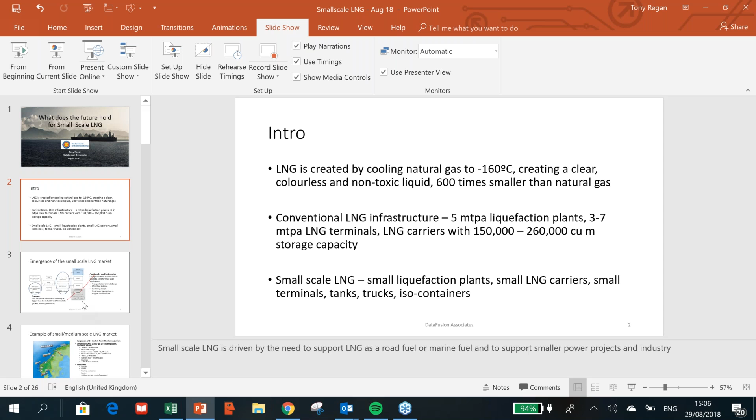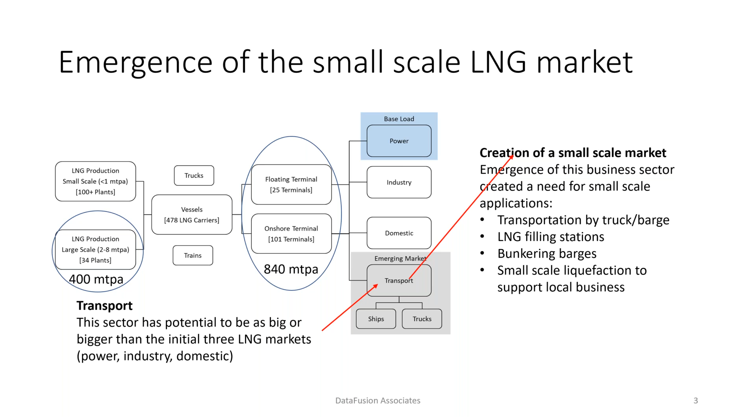But an emerging market now is LNG as a fuel - LNG as a marine fuel, and LNG to fuel trucks. It's the emergence of this market that is also resulting in a call for small-scale applications. In addition, we're seeing a lot of interest in LNG to power. Some of these power plants are very small, or they're located where there's very shallow draft, so you can only use very small LNG carriers, and the parcels required by these power plants are relatively small. So small-scale power is also stimulating a demand for small-scale LNG.

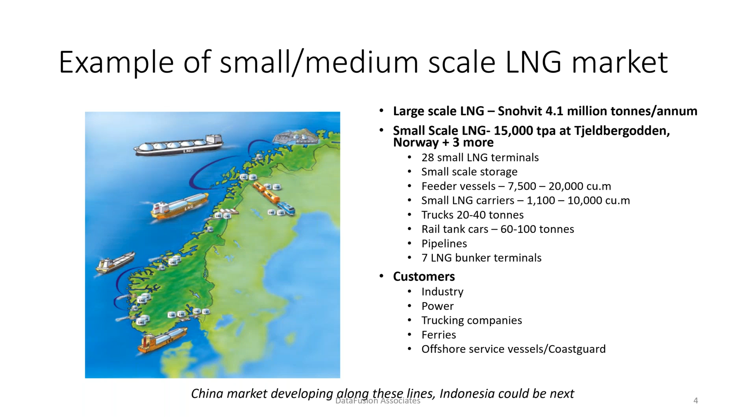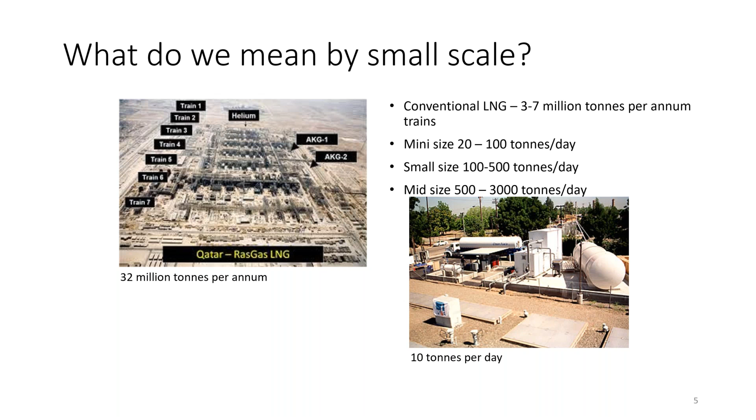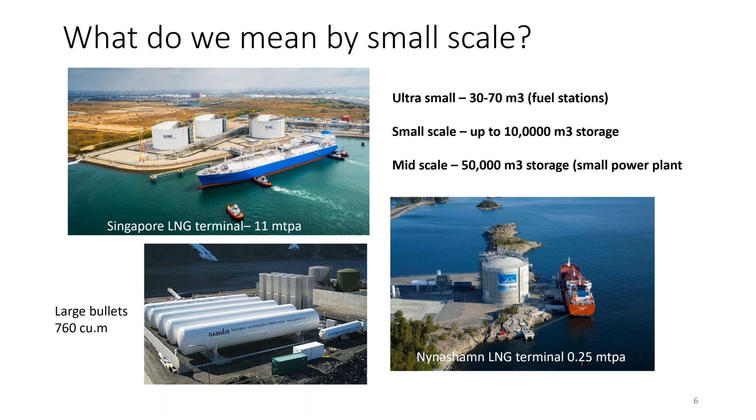What do we mean by small-scale terminals? On the left there's the Singapore terminal, a large LNG terminal with capacity of 11 million tons per annum. Bottom right, we've got Nynashamn in Sweden, 0.25 million tons per annum. And then we get down to ultra small, 30 to 70 cubes of storage - that could be the tanks to support a filling station. Small scale, say 10,000 cubes of storage. Mid scale, 50,000 cubes of storage.

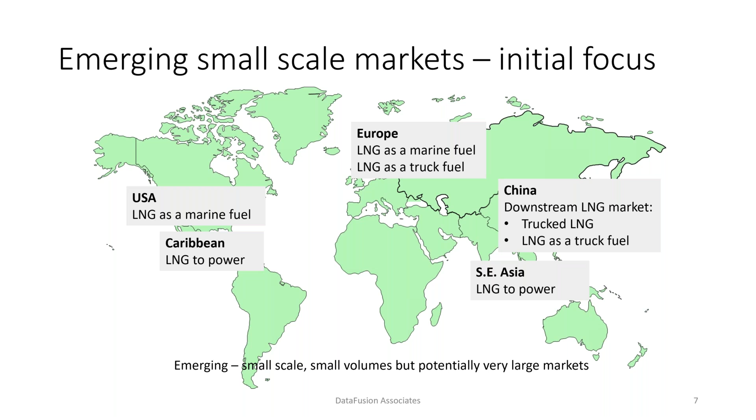How are these small scale markets emerging globally? It varies. In North America, the driver is very much to provide LNG as a bunker fuel, and that's the same in Europe, but also in Europe we're seeing a lot of interest in LNG as a truck fuel, so that's also driving the emergence of small scale applications. In the Caribbean, it's LNG to small scale power being supplied with small parcels of LNG from the US. In Asia, China is the big market for small scale LNG, but the drivers there are trucked LNG - carrying LNG in trucks to deliver it to industrial customers, or LNG as a truck fuel. There's a little bit of interest in LNG as a bunker fuel that's growing. In Southeast Asia, the focus is much more on LNG to small scale power. So the small scale application interests vary significantly from region to region.

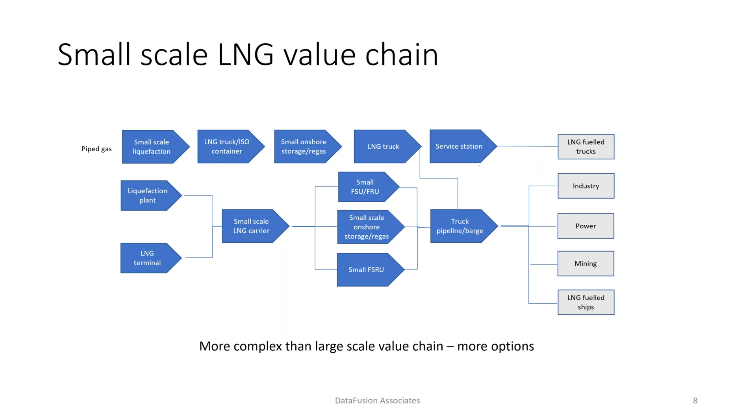It's a flow chart, and it's more complex than large-scale LNG. The top line shows gas going into an LNG filling station, so we start with possibly small-scale liquefaction. The LNG is then trucked or carried in an ISO container to intermediary storage, and then maybe trucked to the service station and supplied to trucks. Elsewhere, slightly more conventional: the LNG is coming from a traditional liquefaction plant or export terminal, carried in a small-scale LNG carrier, and that delivers it into possibly a small floating storage unit, floating regas unit, a small FSRU - floating storage and regas unit - or a small onshore receiving terminal. From those facilities, it then goes by truck, barge, pipeline to the end users: industry, power, mining, and ships.

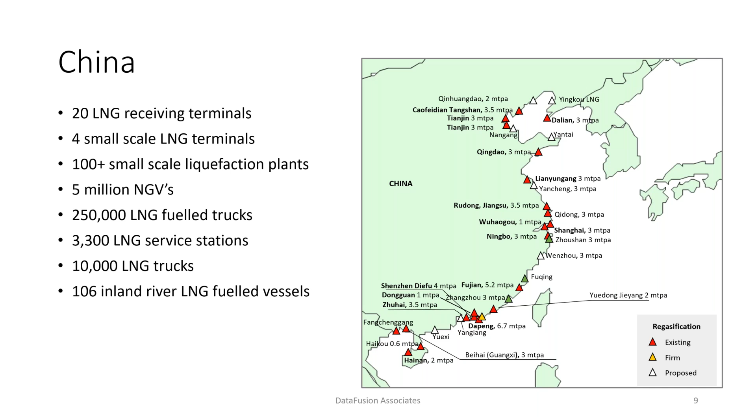China is now emerging as a significant small-scale LNG market. China's got 20 large-scale receiving terminals, but also 4 small-scale LNG receiving terminals. It's got over 100 small-scale liquefaction plants, over 5 million natural gas-fueled vehicles, and 250,000 of those are trucks. To support those, over 3,000 LNG service stations, and over 10,000 trucks carrying LNG to the end users. They're beginning to show an interest in LNG as a bunker fuel, and the focus is on the inland rivers - we've now got about 106 vessels plying the inland rivers that are supplied by LNG bunkers.

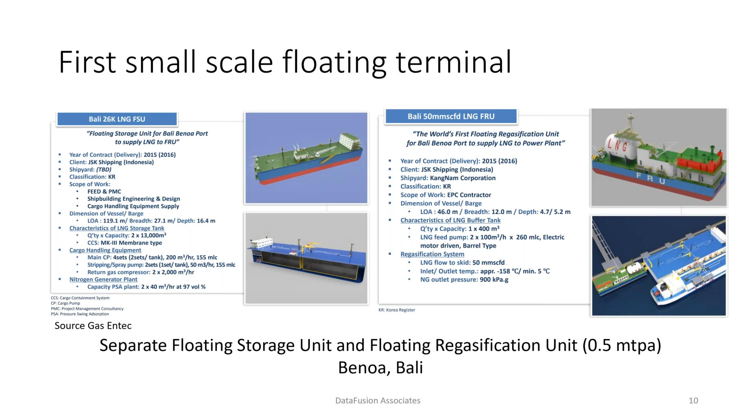In Asia, we've got the first small-scale receiving terminal, a floating terminal, which is a combination of a very small-scale floating storage unit, which you see there on the left, coupled with a floating regasification unit. Both have a capacity of about 500,000 tons per annum. And we can vary this - you may have some floating storage, but you could put the regas onshore. We're also seeing people consider small-scale floating storage and regasification units, which are scaled-down versions of the big ones we see in service around the world.

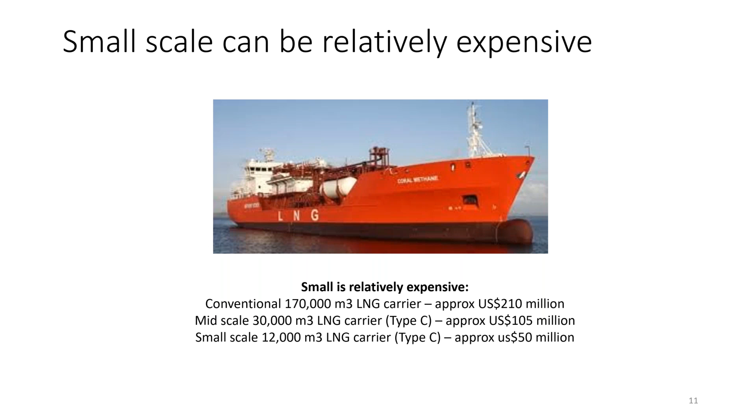And this is an issue with other aspects of small-scale applications. Terminals also are relatively expensive. The cost doesn't scale down commensurate with size, unfortunately, and this has become a key issue in the development of small-scale applications.

But that's not the only challenge. There are a number of challenges here. Lack of experience amongst the governments, the regulators, the project sponsors - they're new to LNG in many cases, and so it takes time to get their heads around the idea of using LNG, and then if necessary regulating it, or even having to pass legislation. The project sponsors may have sponsored a power project in the past, but probably an oil-fired one, coal-fired one - first time they've used LNG. So, a lack of experience, lack of knowledge.

There's also a lack of the environmental and commercial drivers in Asia that we see in Europe and North America. The main environmental driver in those areas is the push to get down to ultra low sulfur fuel for marine fuel, 0.1%. We don't have the same driver in Asia. And the commercial drivers are also a little bit weaker. Sometimes markets are subsidized, so we don't have the same competitive pressures that we do in some of the Western markets. Another issue is what I call a lack of consistency in energy policy.

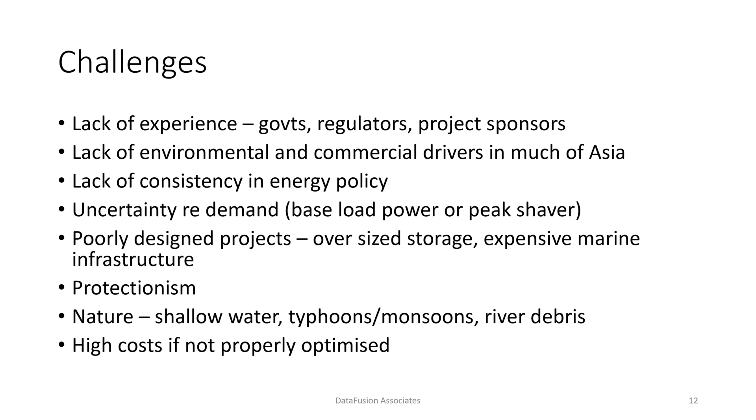And then the other challenge is the high costs, and that's really because every part of this chain has not been properly optimized to ensure you do have cost-effective, economically viable solutions.

How do we get to fit-for-purpose solutions? LNG carriers, the terminals, jetties, breakwaters - all expensive. Do you need them to meet this requirement? Do you need an LNG vessel? Could you do with a coaster with a C-type tank on it, or even barges, ISO containers on container vessels?

Jetties, breakwaters, do you need them? Can you, for instance, use the port facilities nearby rather than building new facilities? Go to somewhere in shallow water or sheltered water where you don't need the breakwaters. Look at the possibility of using trucks and ISO containers for the very small markets. Possibly cut out that onshore terminal - use an FSU as a mother vessel, as a floating terminal, feeding small barges, small vessels that go to the end user.

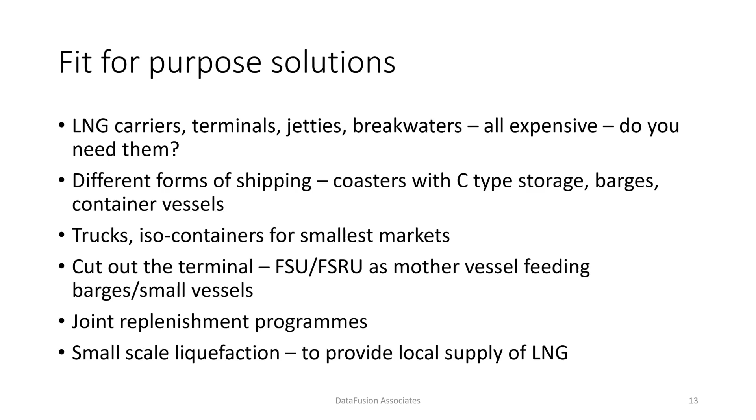Think about a joint replenishment program. Don't design these facilities just to support one client. Look to see where you can supply perhaps 3 power plants. Look at other markets - can you use this facility to support the supply of LNG to industrial users in the region, or LNG as road fuel? Look to see whether you can develop new markets close to these terminals, and this all improves the economics of these facilities.

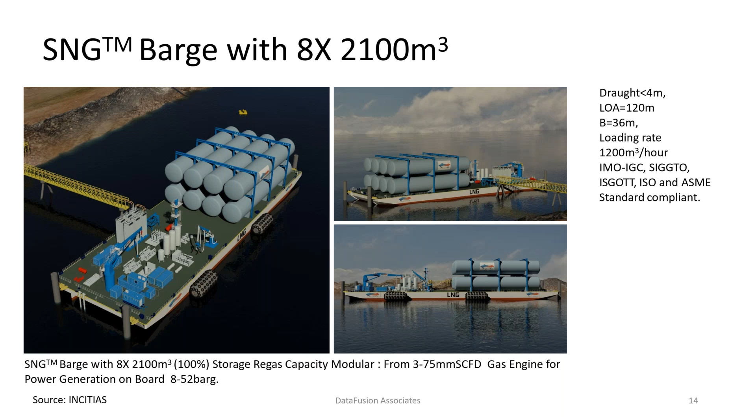Look at a completely different concept when it comes to shipping and terminal. Here we've got a very small floating terminal, containers for storage. A large terminal, a large FSRU may require 20 to 30 staff. This one, 2 staff. They go home at night.

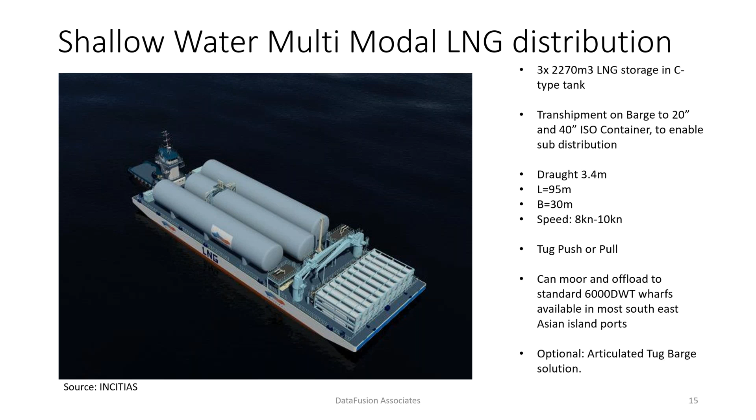A very simple, very cost-effective solution. It's got its own power supply, so it's completely independent. For delivery to end users, instead of a small LNG carrier, perhaps barges with both storage tanks, so you can discharge from those tanks, but also ISO containers, to the end user. Pick the ISO containers up when they're empty and put them back on this barge, refill them on the spot from those tanks. So we have different approaches to the terminals, to the supply.

I can't stress enough the need to optimize and enhance, because a lot of projects, particularly in this region, are not coming together as quickly as people expected, and that is because we haven't spent enough time really optimizing and enhancing the opportunity. What we also need is a stronger message, a vision, and we're also seeking to promote LNG as a diesel replacement. If you talk like that, there's some logic in saying yes, we need more LNG to industry, LNG as a road fuel. That's going to create new markets in the destinations for these small-scale applications. It means they'll be able to absorb more LNG, market more LNG, and that will bring down the unit cost of the facilities.

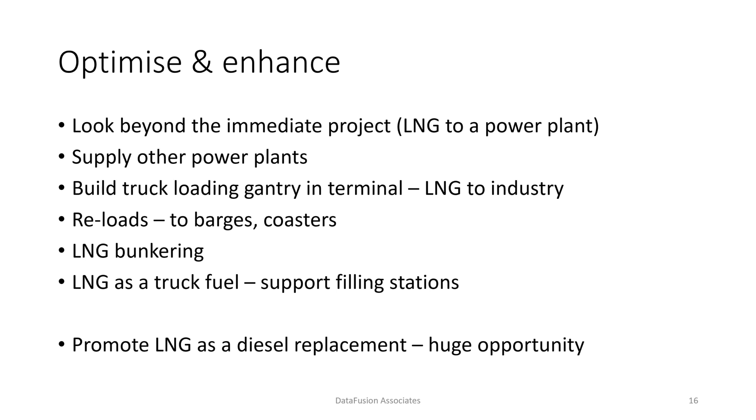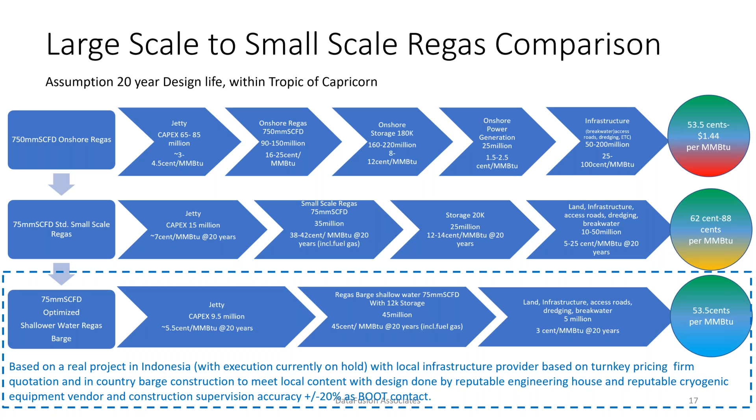This is a very complicated slide. The slide pack will be available to you afterwards. But the message here is, the top line is conventional energy cost base, and then we've got small and very small below. If you really look very closely at those small scale projects, really optimize them, have fit for purpose technology, then you can get your cost down comparable to large scale. So it's not impossible, but it is a huge challenge, and not many people have managed to meet that yet. That's another reason why a lot of these small-scale projects are not yet being sanctioned, because the developers have not yet found a way of getting their costs down to the sort of level that we're indicating could be possible here.

So, to sum up, ASEAN opportunities, there are a lot. Now it's LNG to power, to small-scale power, particularly in Indonesia, in Myanmar. Our next speaker is going to be talking about the possibilities in the Philippines. Diesel replacement, this is something Korea is very enthusiastic about, getting diesel to offshore islands, to remote off-grid areas. But in this area, there's a lot of focus, particularly in Indonesia here. LNG as a bunker, well, the leader here is Singapore. There's limited interest elsewhere within ASEAN, but not yet significant. It's starting. LNG as a transportation fuel, Thailand, just starting to see some interest in other countries. LNG as a fuel for heavy plant, particularly mining equipment. Indonesia, there's interest from the East Kalimantan miners in using LNG to fuel their plant and their huge trucks.

And the markets we should be watching and learning from: China. It's become the biggest small-scale LNG market. And now India, because that's now developing its domestic gas market, its domestic LNG market, and we're now seeing them introduce some small-scale applications. So watch how things develop there.

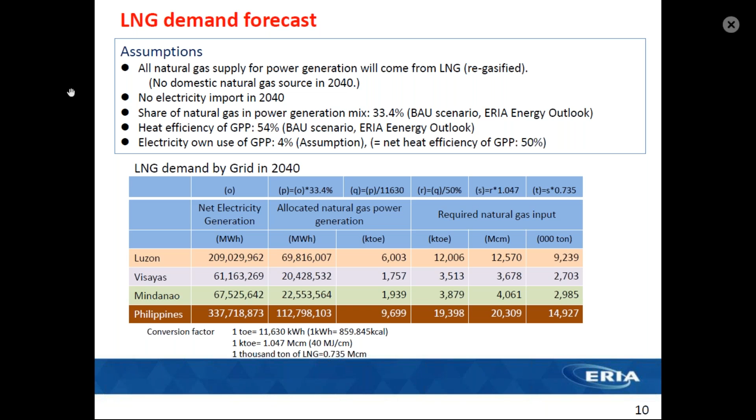So for Visayas and Mindanao, you can see the demand in the last column is much smaller in terms of the scale of LNG compared to Luzon. So it's more suitable for developing small to medium scale infrastructure.

And the next slide shows you our high-level vision for the Visayas grid and the Mindanao grid. In the Visayas grid, electricity demand is concentrated in the Cebu area, which will consume about 40% of the capacity of LNG infrastructure to be built, so that there is some capacity remaining to serve other ports and islands using the small-scale LNG supply chain. That means using small to medium size LNG barges.

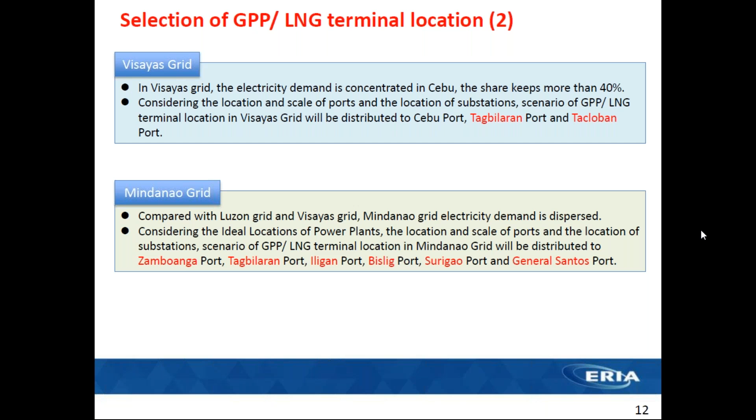The next slide will show you on the map where these potential secondary or tertiary terminals would be. For example, in the northern part you see the Cebu port, Tagbilaran, Surigao, and in the southern area you see Zamboanga, Iligan, General Santos, and Bislig.

So basically, our job is not only to do the math about how much LNG will be needed and what level of capacity is to be built. Our job is also about how to optimize the infrastructure so that we can minimize the cost. As you know, for this kind of logistics planning, inventory is a main issue. That means inventory is translated directly into the physical storage capacity that you have to build on each site.

So if you build too big a capacity, that might be a waste of money. And if you build too small, there might be a disruption of supply. In cases such as typhoon seasons, there will be a cutoff of this LNG supply and therefore the power generation from natural gas. So we don't want to invite that kind of situation, minimizing that risk as much as possible while also controlling the cost.

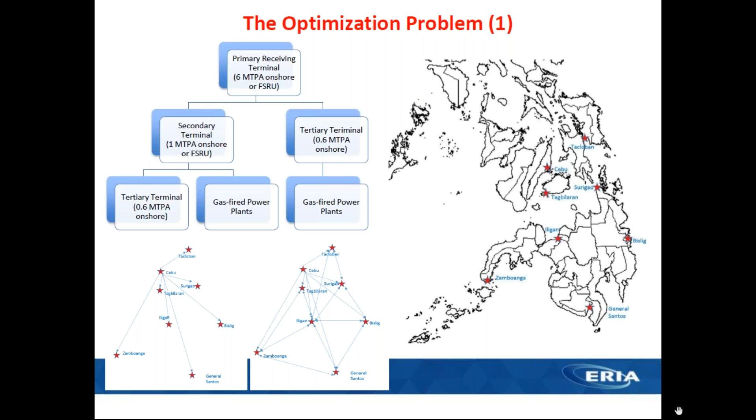That means you start from some main port and keep it running to the first, second, and third, perhaps a fourth one, until you finish the storage capacity, and then return to the mother port, get reloaded, and start the next journey to feed several others.

So compared to the hub and spoke model, the benefit of doing so is, of course, capex. But the downside is possibly the OPEX. As you know, the fuel consumption of running around using the vessels and making many port calls could be quite costly. For people familiar with marine shipping, you probably know that the call to the ports is actually quite expensive.

And also, there are many ports listed here. They come with the limitation of the depth of water at the port. Therefore, large barges doing the milk run may not be able to reach these ports. So these are the cons of the milk run models.

So as you see, this is our optimization problem. Please go to the next slide. The optimization problem number 2. So these are some verbal descriptions of the optimization problem that we face.

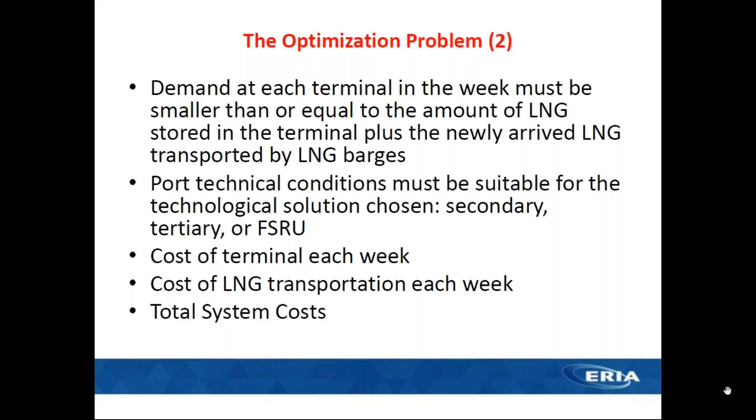And secondly is the port technical condition, for example the depths of water and other physical conditions. And lastly, we have to consider the cost of the terminal, the capex and operation costs, and also the cost of LNG transportation, that means the LNG barges. This cost will add together as a total system cost. So in our simple linear programming model, our objective will be set as to minimize the total system cost.

Actually, we are not an engineering company or industrial player, so we don't have the actual numbers. We take the information from various literature or other sources of information. So these numbers are yet to be verified, that's why we call them capex and opex assumptions.

As you can see, one apparent difference between our assumption and Tony's mentioning of the cost of the barges is quite big. Tony mentioned some 50 million US dollars per small barge, but our assumption is only 3.6 million. So quite a huge difference.

Perhaps what he mentioned is the cheaper solution, which means converting conventional ships and loading them with steel tubes to carry the LNG. So if you look at this cost as the conversion cost, the 3.6 million US dollars per ship for conversion and installation of the tubes, maybe this is still a reasonable assumption.

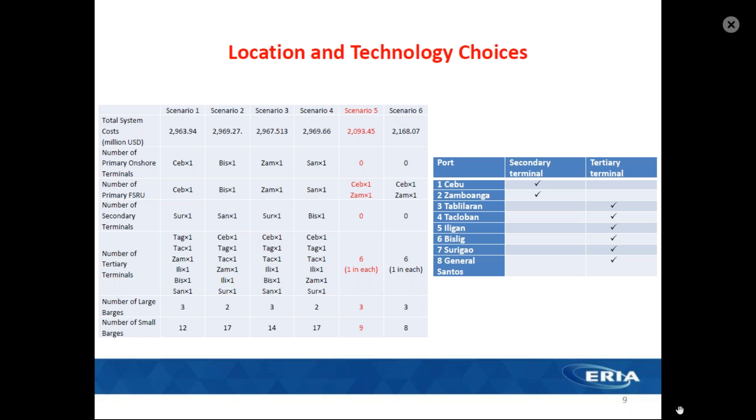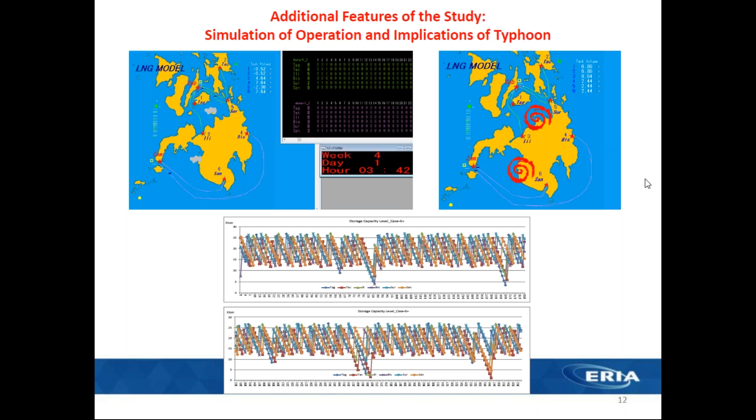That sets us a new challenge to design the appropriate level of storage to be built on each site, so that with larger storage on site, the inventory can endure longer during typhoon seasons until the next delivery arrives. We have detailed results in our report.

I will stop here and see if there are any further questions.